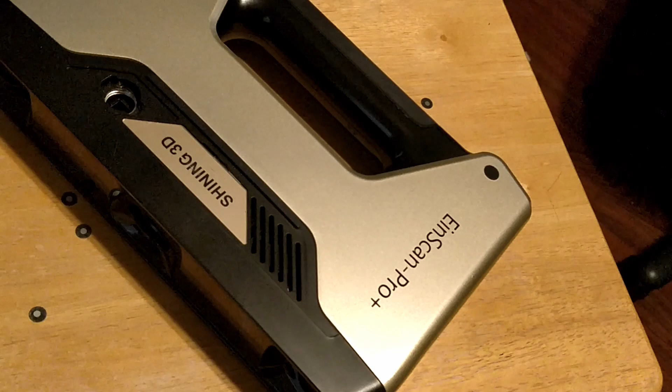Today we're going to look at a product by Shining3D. We're looking at the Einscan Pro Plus. This is a 3D scanner that uses structured light for 3D scanning. What that means is it's going to project a fixed pattern, and then using its stereoscopic cameras it's going to generate a point cloud that we can use for reverse engineering purposes.

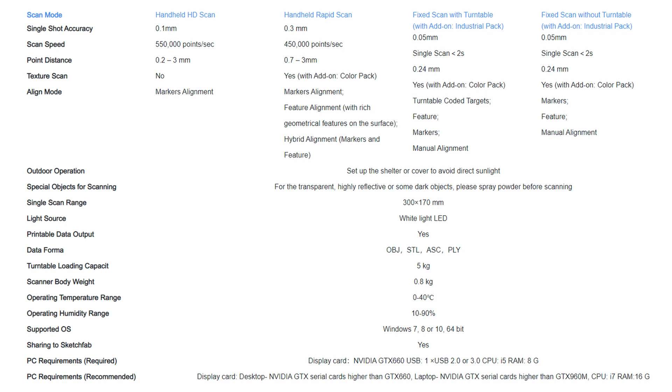Here is a spec sheet taken from the Einscan website. It gives you a sense of the accuracy and speed of the Einscan Pro Plus and the various scan modes that you have available. It's important to note that the Einscan Pro Plus was released in late 2017, and here we are in late 2021, so this hardware is about 4 years old.

In addition to the Einscan Pro Plus, we will be testing the optional HD pack. The HD pack is an external camera that is attached to the scanner unit and gives us almost 30% additional scanning speed by using infrared light to help align with features on the surface of your target.

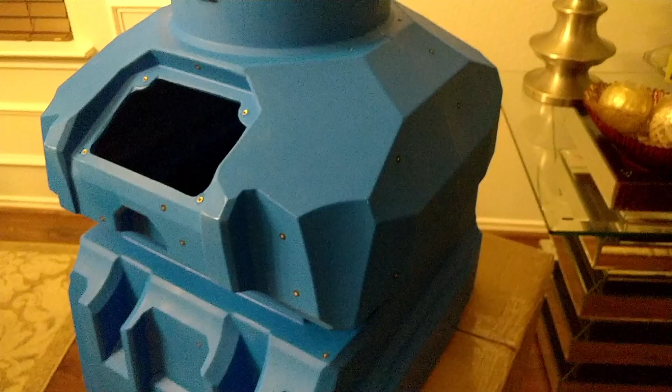This first example is reverse engineering a plastic housing using the Pro Plus HD scan handheld mode. The reflective targets always help on smooth surfaces, but the HD scanning pack really helps with the additional speed when you're scanning parts this large.

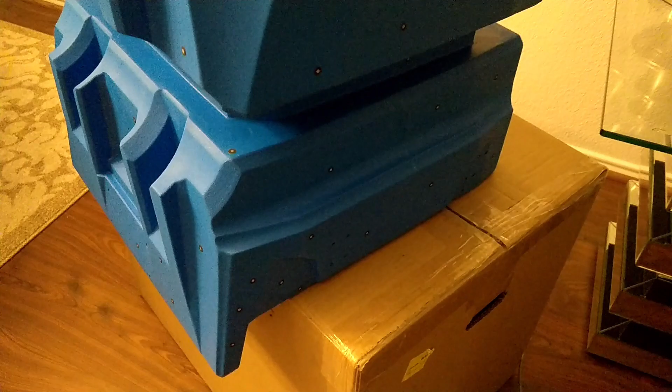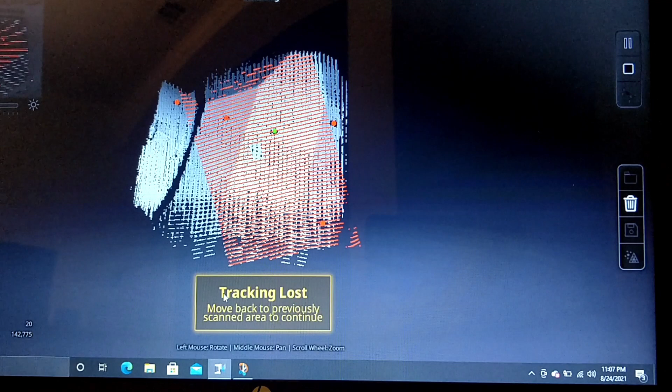And once we start scanning, you can see the active lines start appearing in the view screen. And then once you turn on, then it'll start capturing the points in real time. Occasionally it'll get lost, and so you sort of zoom out and zoom back in, and then you just slowly work your way around the part continuously while trying to keep targets in sight, and then you eventually build a full point cloud of your target.

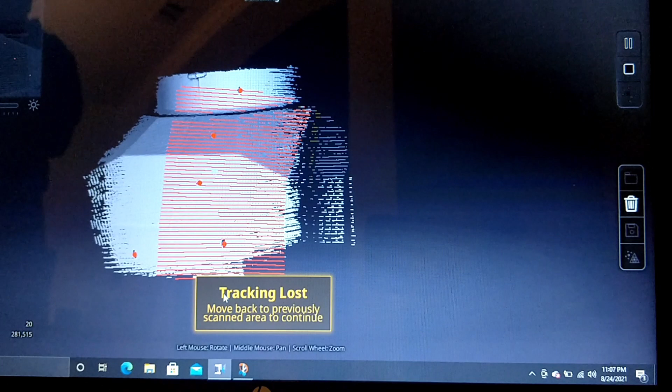Advantage in most of the reverse engineering cases is most parts tend to be symmetric, and so really you're only shooting to get coverage of a full half of something this large, because you can reverse engineer it and then just apply symmetry in your software.

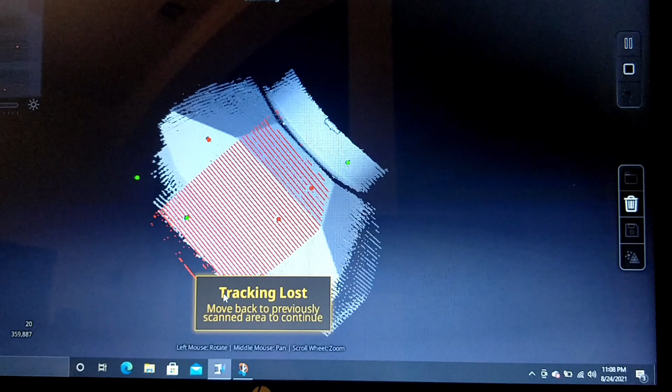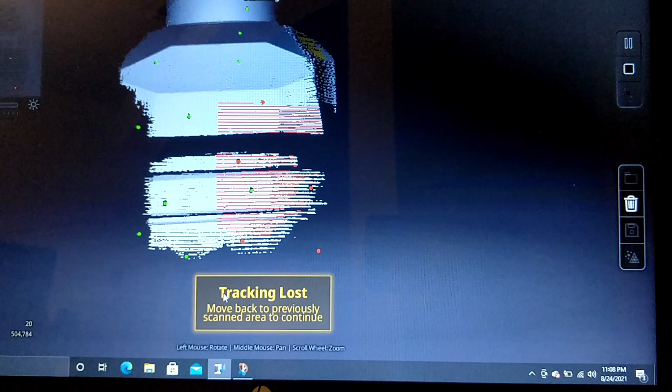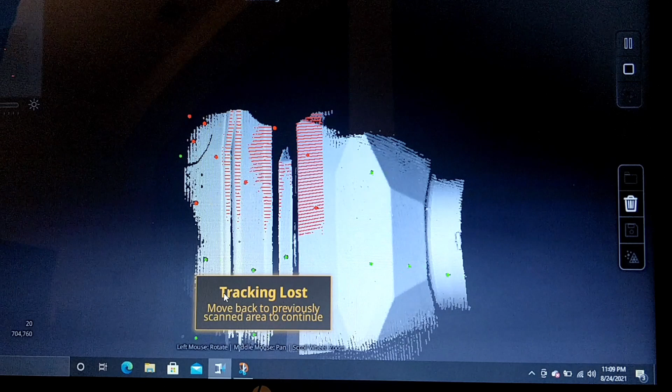It is worth noting that using 3D scanning software like this is not turnkey. It's going to be very technical work. Typically your 3D scan is your starting point. You'll get a point cloud or a mesh, and then you'll import it into software of your choice like Creo or Solid Edge or SolidWorks, and begin using the 3D scan as the foundation for your reverse engineering. So you will have to apply CAD skills to turn it into a CAD model that you could use for remanufacturing, as is in this case.

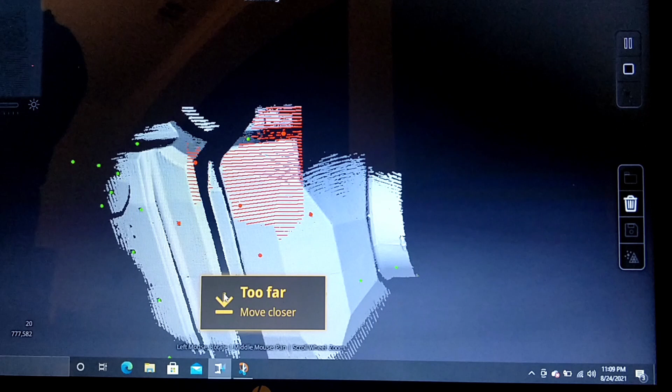So keep that in mind, that the scan is really your starting point, and then you can use it to trace and recreate your 3D model with a high degree of precision and accuracy.

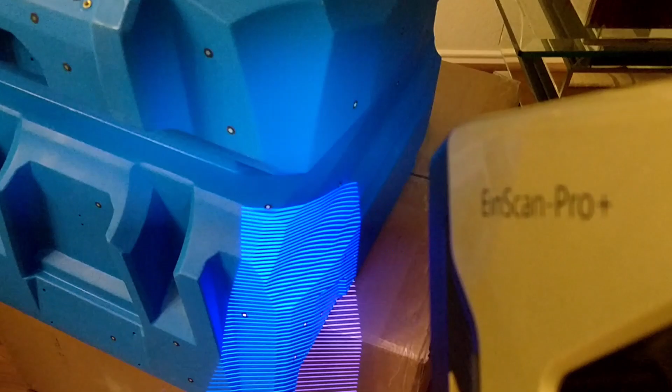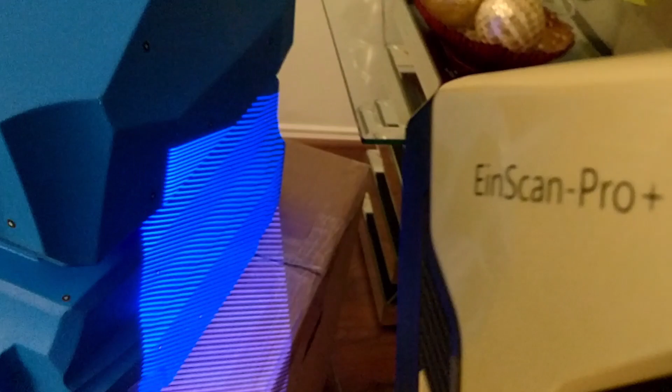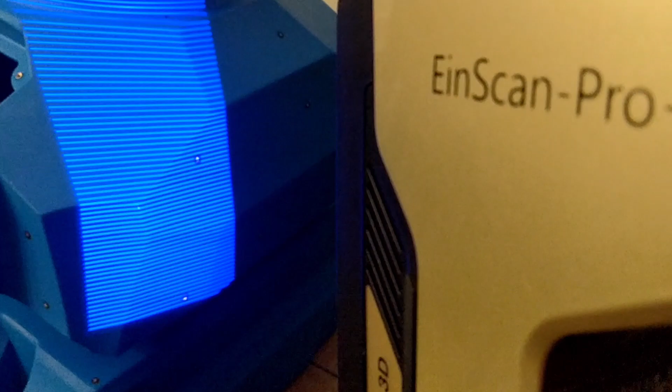Here you can see an example of the structured light. It's doing a flash and it's doing a grid, and this is what's going on while the point cloud is being generated. You have to make sure that the projected pattern is within focus and within range, and the lighting quality is adequate for the cameras to pick up the projected pattern. What's really advantageous in this case is the matte nature of the plastic makes it very easy for the camera to pick up the surface.

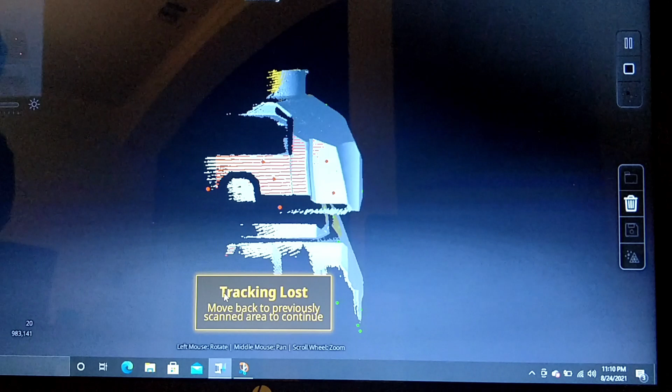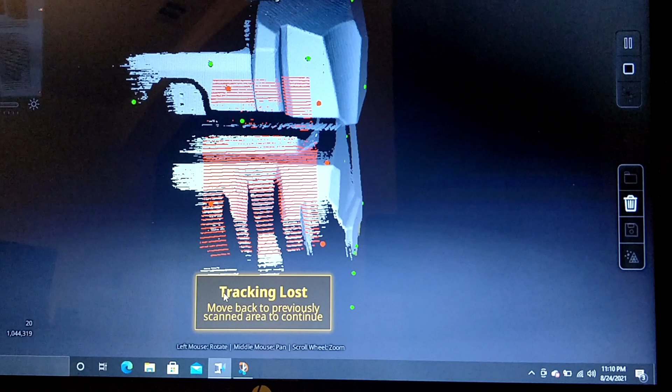The camera's real single failing is its issue with shiny surfaces. We'll see that in a little bit, but shiny black surfaces are really difficult for the camera to pick up. So be aware whenever you're deciding what to scan, that shiny and dark colors really don't work well. But there is a real easy way around it, which we'll see in just a little bit.

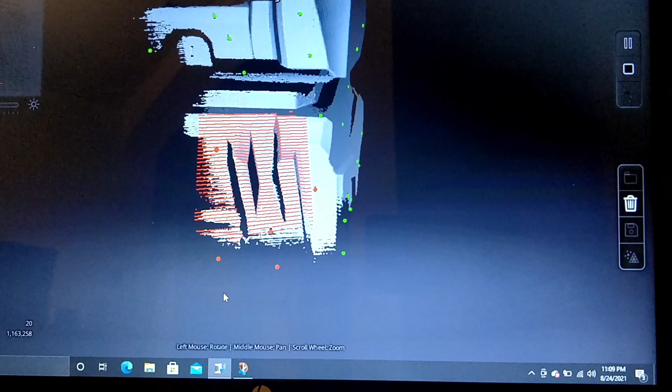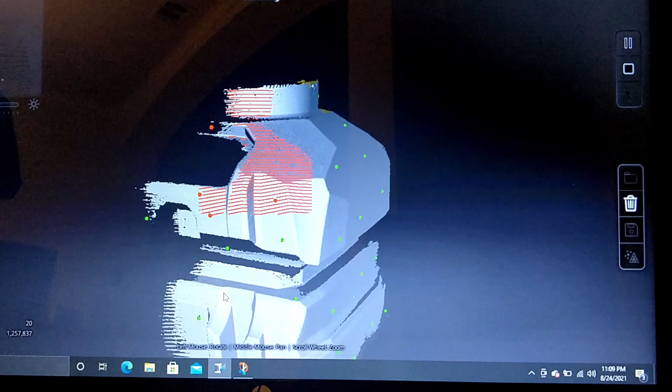While you're scanning it here, you can see all the green and red dots. Those are the tracking dots. And if you have enough geometry, then you really don't need it. That's really the big advantage of the HD pack, is that it picks up the complex geometry. But if you have the space for the reflective dots, it's always a great way to add that added level of accuracy, because it's easier for the camera to pick up those dots and reacquire where it is in space.

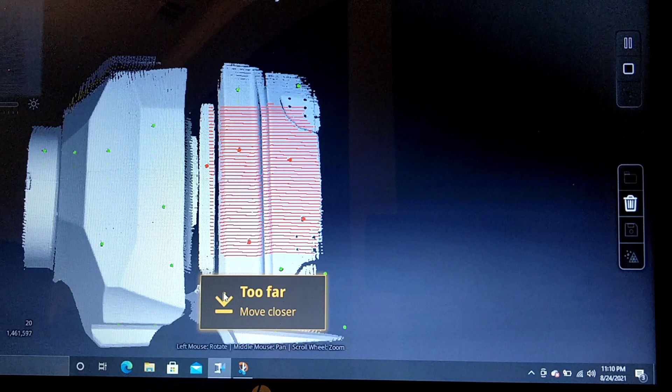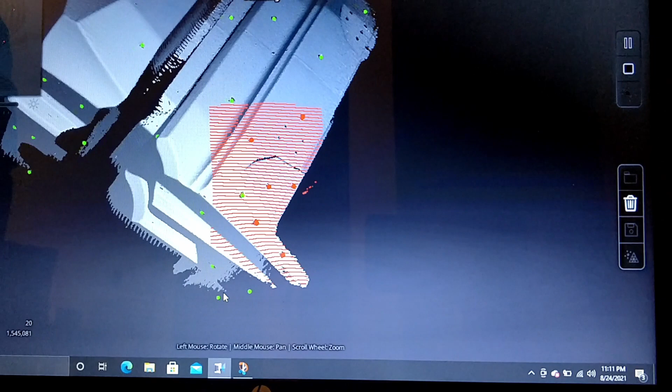While watching the scan, one thing to consider is that this is hardware that was made in 2017, and it's almost 4 years old, and technology moves pretty quickly. Shining3D is keeping up with that, so their newer lines of scanners have better sensors, better processors, better optics, just all around better overall. So they're much faster, cover wider areas, more accurate than what you're seeing here in the Pro Plus.

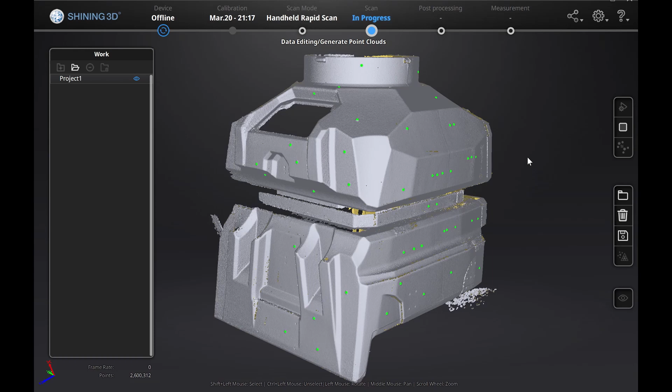The Pro Plus, despite its age, does a pretty decent job when you are patient with it. Just remember that the newer hardware that's available now is much faster, more accurate, and just better overall. The software, they're still improving it constantly. So my hat's off to the folks at Shining3D for continuing to develop their software.

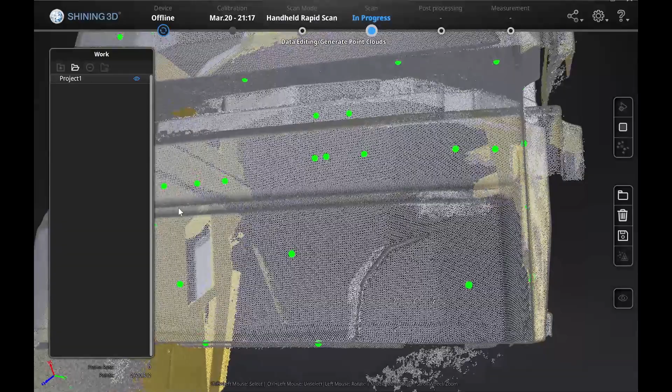And here you see the points for our housing and the green dots. And this is, like I said before, since this is symmetric, we only need to make sure that we have enough for half, which is, you can see, more than adequate for what we have right here.

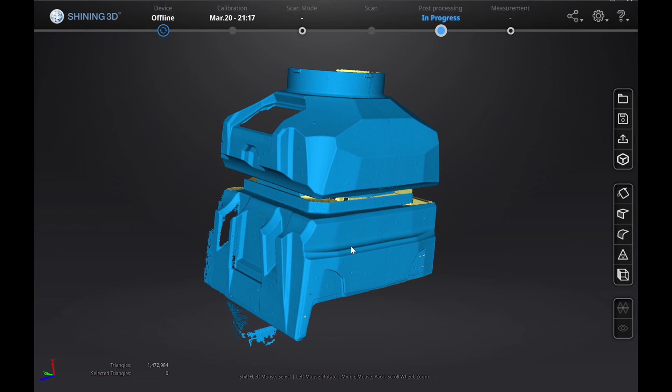But it's very accurate. And this is what it looks like after it's been meshed. This is a closed mesh. Whenever you run through the meshing software, it'll give you the option for a watertight model or just an open model. And so I'll always get the closed model, because then you can bring it into your software and then start extracting geometric information to start reverse engineering.

And so this is what it looks like after it's been significantly sliced and diced in your CAD software and turned into a model that will be usable for manufacturing purposes.

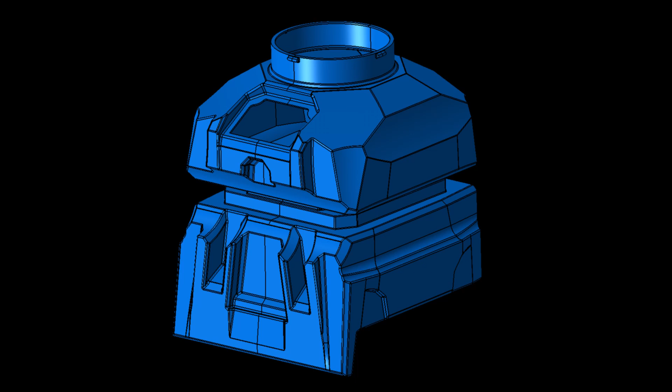This next example really highlights the power of the Pro Plus and the HD pack. We have a model car, 1/16 scale, with really fine contours and subtle shaping, and we need to bring that in so we can start manipulating it in software.

As you can see, the biggest problem that we have here is the shiny black surface. Now, ordinarily, I would spray paint this with some gray paint or some 3D print spray, but since this isn't mine, I came up with an alternate solution.

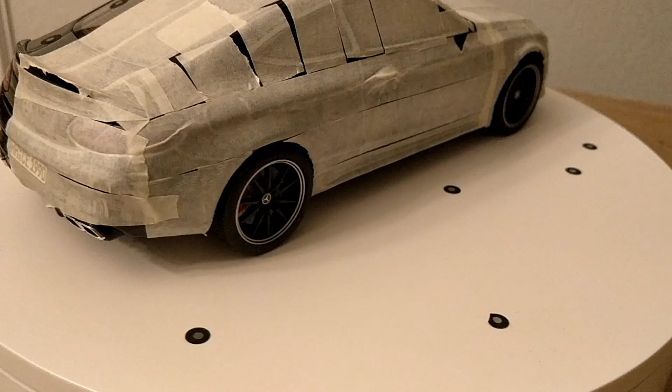What that is, you just cover it in masking tape, and the masking tape is matte enough for the 3D scanner to easily pick up, thin enough for you to ignore, and still pick up the fine contours of the vehicle body, as you can see here.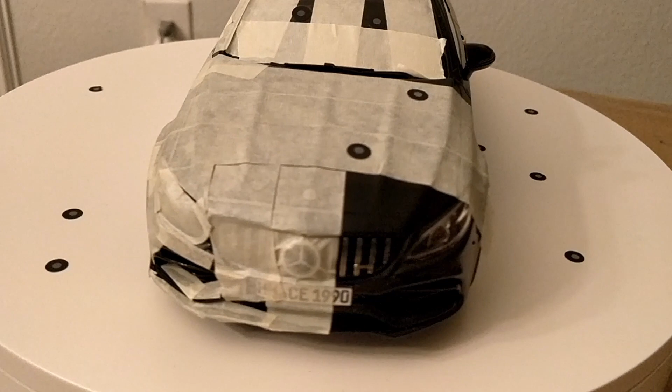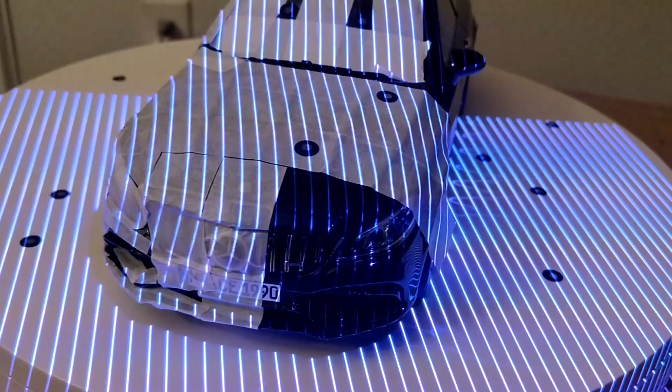It is important to note that I am using the handheld mode, where the Prime Pack really shines, even though I've got this turntable that I've rigged up myself. There is a dedicated turntable that Shining3D offers for extra precision of small parts, but that is separate from what we're seeing right here. This is the handheld mode, and this is just some commercially available turntable that helps me move the part rather than moving around.

And just as easily you could have kept the part stationary and moved around.

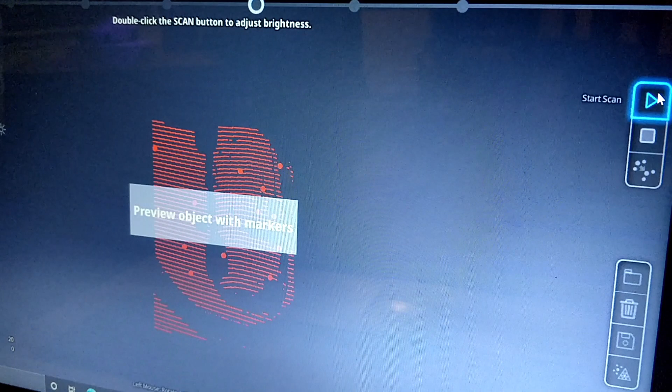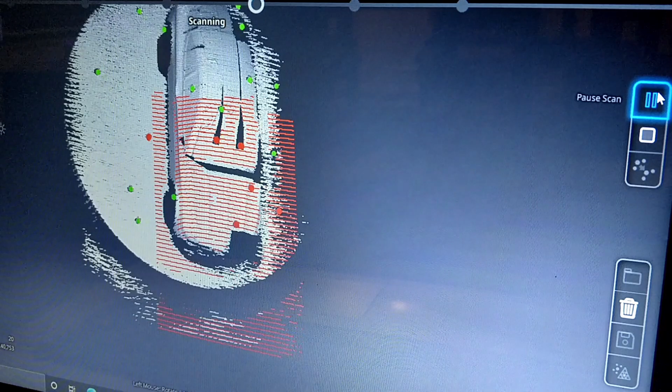Here you can see how easily that masking tape shows up on your 3D scan. It pretty much pops up instantly. It's both light and fairly matte finish, so the stereoscopic cameras have a real easy time picking that up, and the contours, as you'll see in just a second, are just as visible.

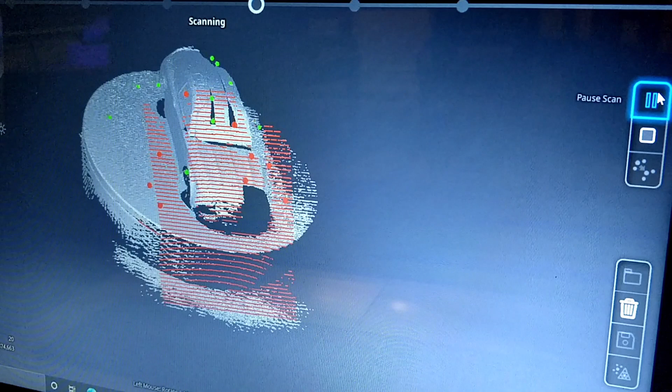In this approach, the masking tape does add a tiny bit of thickness, but for the overall shape that we're trying to capture, it's negligible, and we're still more interested in the shaping details that show up. So the masking tape might not work in every situation, but for this situation, I was reluctant to subject such a nice model to paint, so that's why I elected to go with the masking tape.

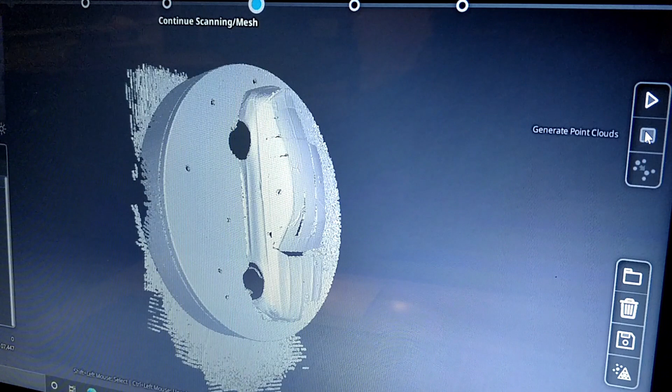This is what the result of the 3D scan we just performed looked like. And as you can see, there's no shortage of details. You can actually see where the masking tape overlaps each other. So that's the level of detail you can get.

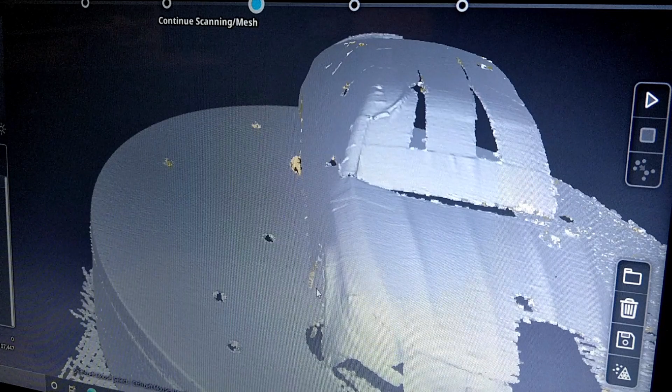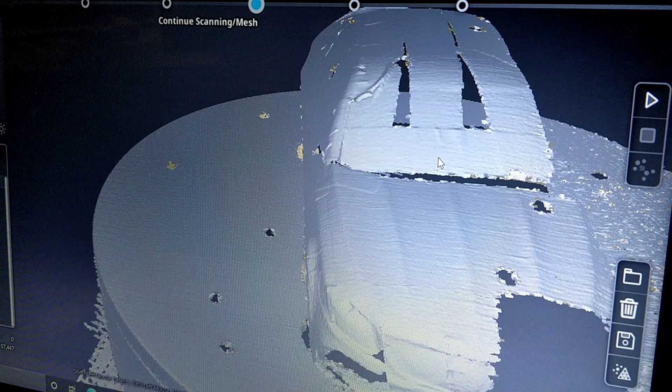Like I said before, it's a symmetric model, so basically we only need half of it. And the detail that it's capturing, the major contour lines, the lines in the hood, the roof line, and the character line of the vehicle, these are the major details that I was looking for, and it captured it more than adequately.

If we really needed the full detail model, then 3D scanning spray, you can search for that on the internet. That's pretty readily available. That's a temporary powder-like spray that you can put on shiny surfaces specifically for 3D scanning.

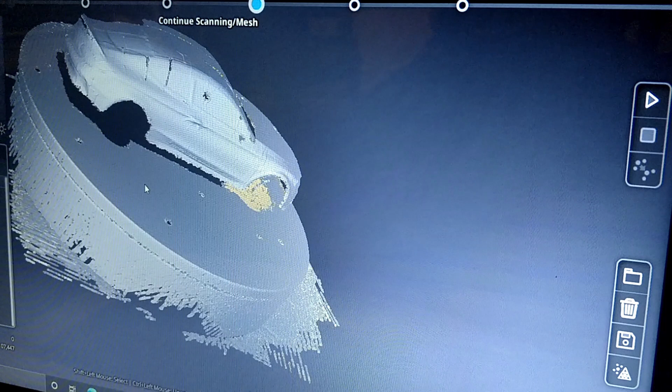Here's what the 3D scan looks like when you export the point cloud and bring it into other CAD software. Again, you can see all the major detail that you're looking for, all the profile, the character lines, the contours, and where it changes and things like that.

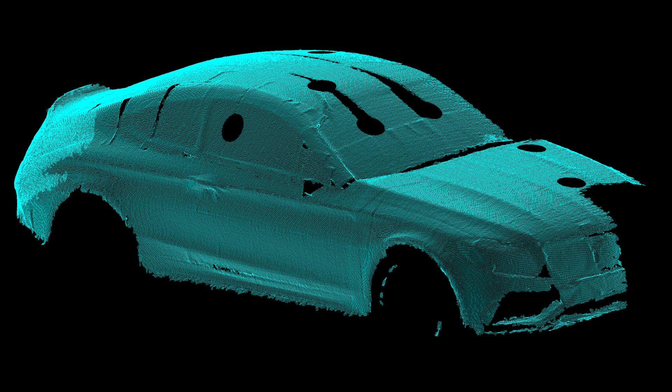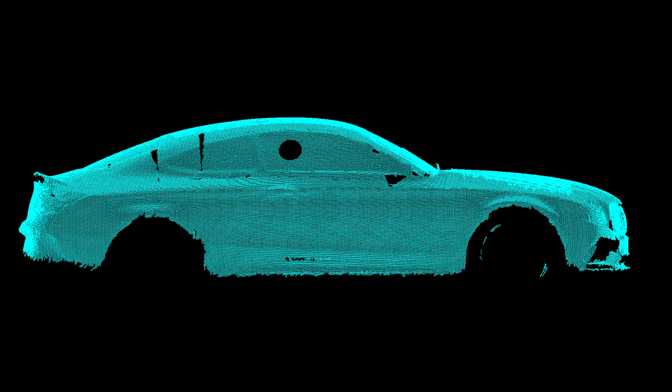Everything that you need is there, but you do have to pay attention to the color around here. So in our case, the wheels were too shiny, and they didn't show up in the 3D scans. If that was necessary, that too would have had to be covered with masking tape, or for fine detail, there wouldn't be a way around it—you'd have to use the 3D scanning spray. But for my specific application, the masking tape worked great, and I highly recommend it.

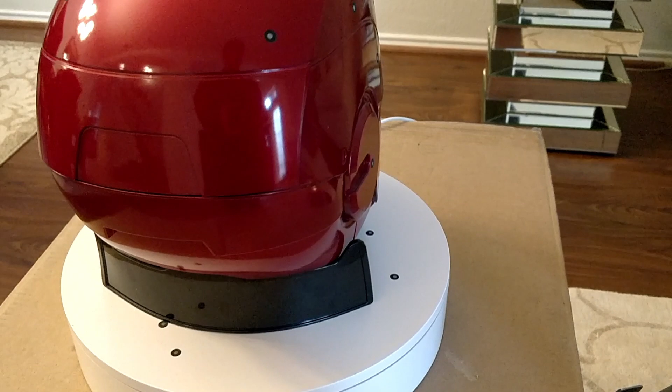This next project was an experiment with the 3D scanner, attempting to replace an existing faceplate on the Iron Man helmet with one of my own design.

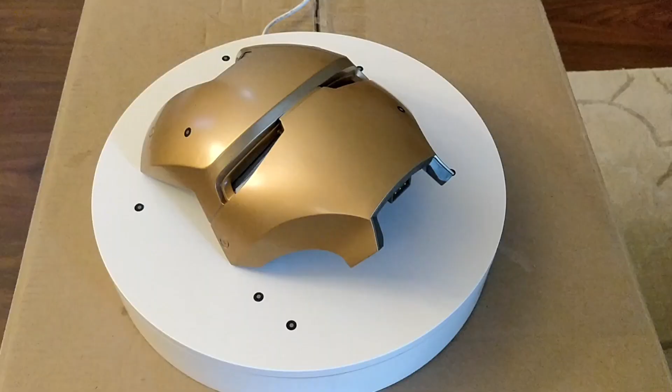This test used the fixed scan mode, meaning the scanner is stationary and it takes a series of pictures, and then you move it and do this several times, and the software automatically takes these multiple scans and overlays them on top of each other. So it's a series of scans taken from different angles while the scanner sits on a tripod.

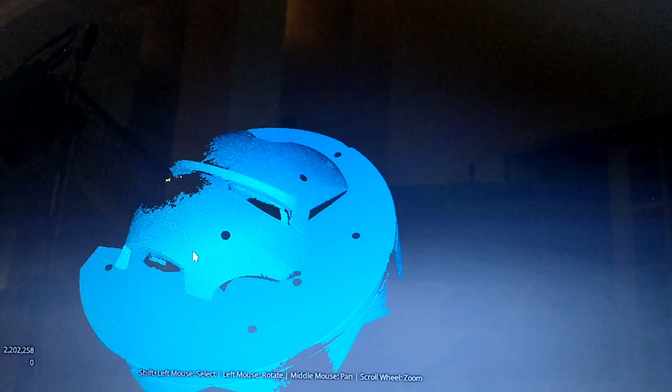What you see right here is the result of several scans that were automatically aligned and overlaid. And again, it's a symmetric object, so we only need half to be able to import. And it works really well.

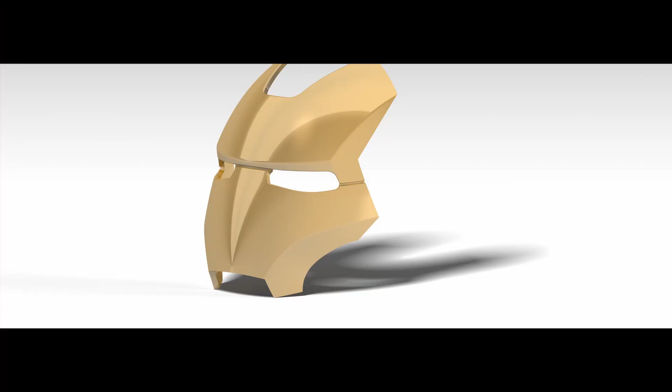The gold surface could have been better, it was a little problematic. So this file was exported to a point cloud or mesh, imported into CAD software, and reverse engineered to produce the image that you see.

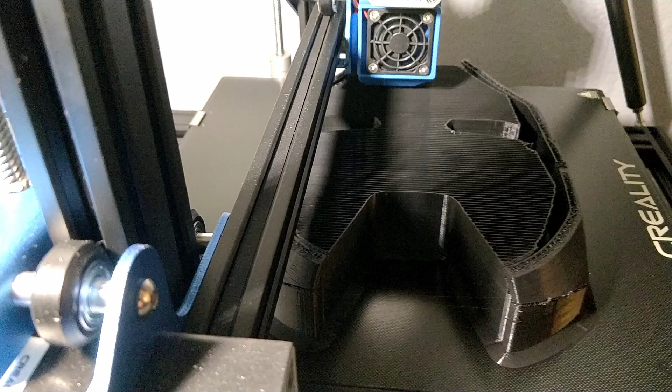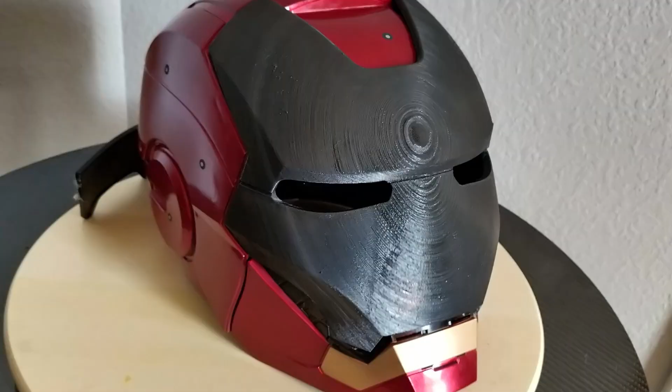And then I went through a 3D printing process to duplicate it. Once I got it done, I managed to actually get it to fit into the existing helmet. So the accuracy and the precision is there. It does take some work to turn a 3D scan into something useful, especially for reverse engineering.

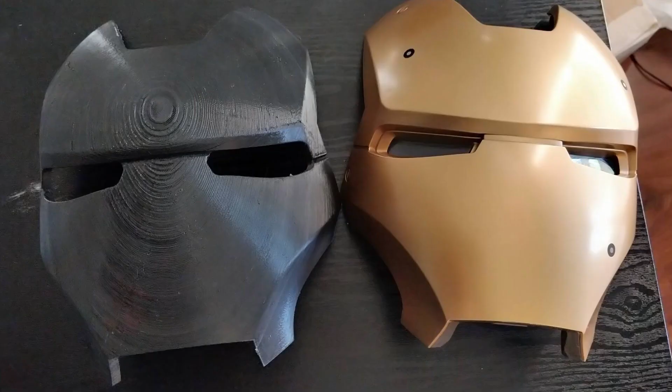So these three projects were just a few examples of how powerful the Pro Plus is, and the additional power that the HD pack provides. And this again, all taking into account the fact that the hardware is 4 years old, and what Shining3D is putting out right now is leaps and bounds ahead of what you saw here today. So even though the Pro Plus is still a respectable piece of hardware, the current offerings from Shining3D are definitely faster and easier to use than what you saw here today.